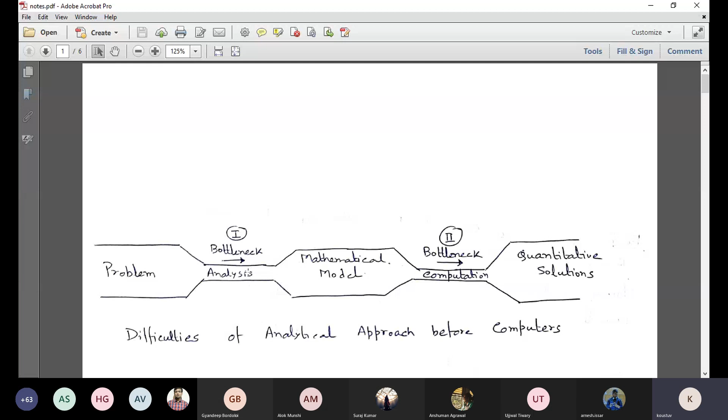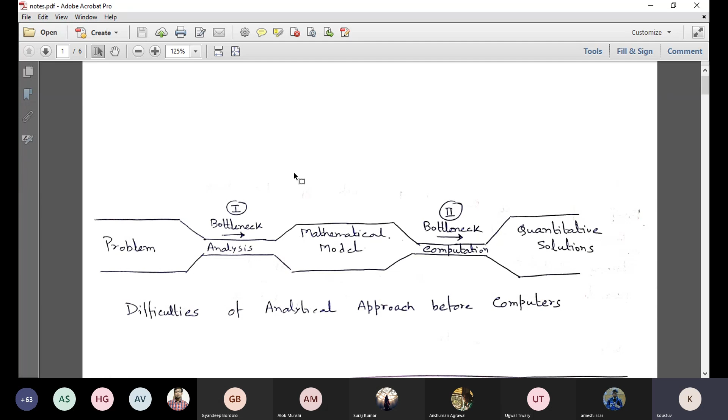So let me skip this part and discuss the content of this course. As I have to start recording maybe. Achha, what is class record? Yeah, I already discussed this. As it is already recorded, that's fine. Now let us go to today's content discussion. Okay, so now, can you see these lines, are they looking small or is it fine? It's okay. It's perfectly fine.

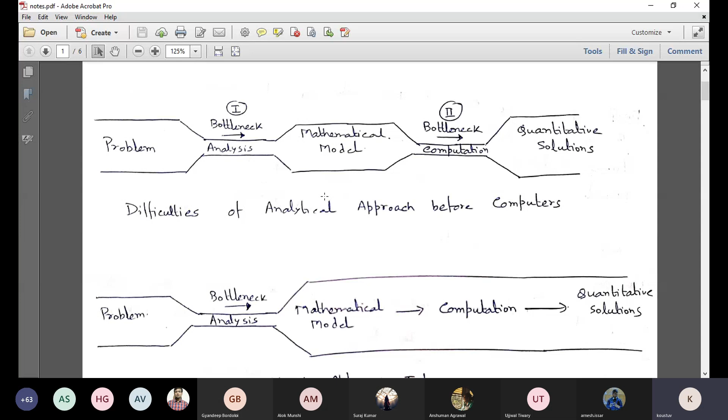Okay, thank you. So yesterday we left this part, which is just to give you an overall idea about how computerized simulations or computer tools are actually helping us in solving complex problems that we commonly face in the chemical engineering or process engineering stream. In earlier days, computers were not available, and the digital scope was not there. So people used to rely on solving the equations by mathematics or the available analytical solutions. So there were almost two bottlenecks.

First, the analysis part of the problem, that means the problem formulation. That is one important area where you have to emphasize more. So that is bottleneck one. That is a kind of challenge. You have to bring out the mathematical equations. You have to formulate the problem in such a way that it represents it. So from the definition of the problem, you have to formulate it. So that is a kind of bottleneck.

And the second hurdle was the solution of those mathematical models. That means the equations, which are typically coupled equations, both simultaneous nonlinear algebraic and differential equations. There is a term called DAE, differential algebraic equations, which has both combined. For example, there are 5 equations in a particular model: 2 are nonlinear algebraic and 3 are differential. So there may be 5 unknowns and 5 equations. So these are complex equations, and yesterday you looked at that table where most of the elements actually fall into the category of impossible.

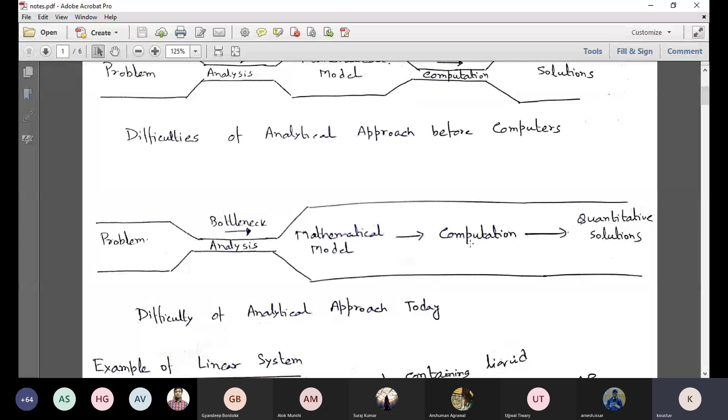So this second hurdle was there in earlier days before computers came. Now the only hurdle present is in the analysis part, the problem formulation part. So this is the scenario today. That means the major emphasis, major importance has to be given to this area, where if you can come up with a suitable model, then getting the solutions or quantitative results is not a difficult task.

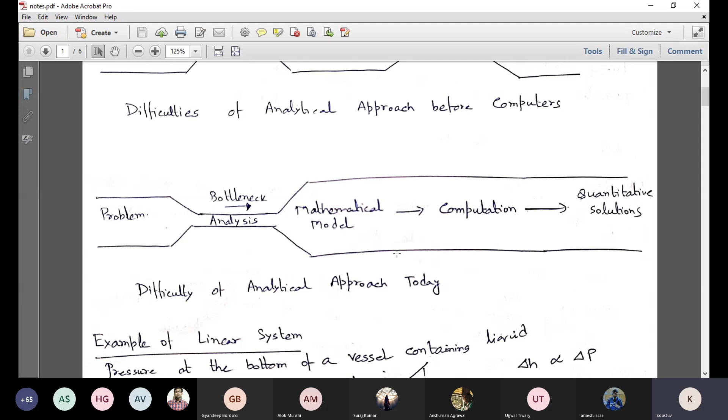Now there are examples of linear systems. This is not difficult; you can easily follow. You see, the pressure at the bottom of this vessel containing some liquid is a linear function with respect to the variable h. That's the height of this tank. And this is the atmospheric pressure, and this is the pressure at the depth h.

So one has to be very careful about which one is the dependent variable, which one is the independent variable, and which are the parameters. These are very essential elements of any modeling task: identifying and selecting the particular variables. So this is a linear system example.

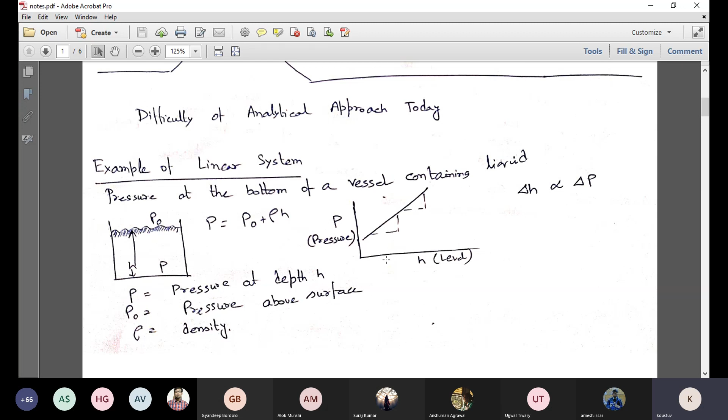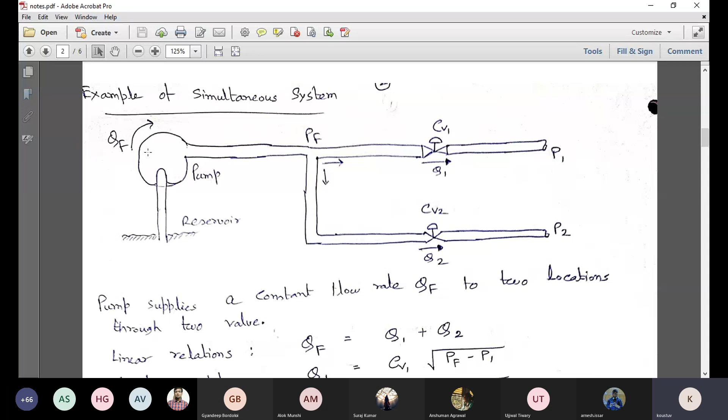Now there can be both linear and nonlinearity in certain systems. Let's say this is an example of a reservoir from where you are using a pump to send water to two different locations, and the exit pressures there are P1 and P2, and this is the pump. QF is the total flow rate or discharge rate, and this is the discharge pressure PF. Now this is logical, right?

The relation we can make from this system is a summation of total volumetric flow rate. Obviously this comes from the mass balance, and I have not incorporated the density because it's assumed to be constant. When we do complex modeling problems, we'll see the step-by-step task: first defining the problem, then writing the assumptions. That is very important. If you change your assumptions, your model equations may change.

But here there is not much complexity. It's a simple system, but having both linear and nonlinear terms. Here the nonlinearity is coming due to the flow through the valve. This is the typical expression you have already seen from fluid mechanics, coming from the energy balance, the extended Bernoulli principle, for flow across the valve. So any change in delta P is not linearly proportional; rather, the square root of the pressure is proportional to this flow rate, the discharge rate.

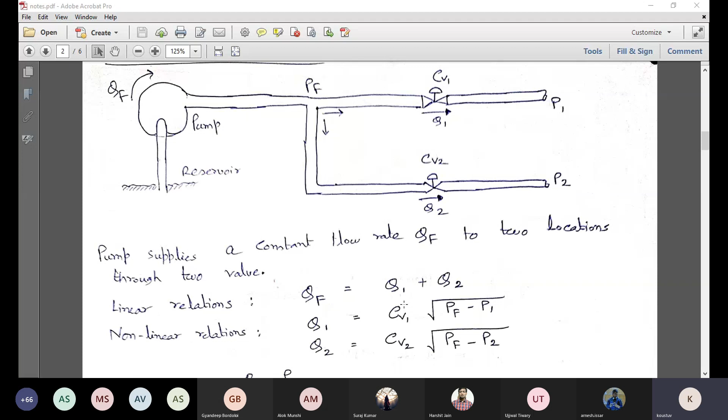So this CV1 and CV2 are typically constant, so you can term them as the parameters of this model, rather than these are the variables. So Q1, Q2 and PF, these three are basically unknown, and the rest of the quantities are known. So here one thing is very clear, that you have to first identify the unknowns present in the system, and accordingly you have to frame equations so that the number of unknowns is equal to the number of independent equations.

Now here one thing is very important, that when you are framing this kind of logic, or you are getting as many unknowns as independent equations, then you have to thoroughly check that you don't get any redundant equations, because if you get a redundant equation, then that is coming due to some algebraic operations, let's say addition of two other equations, or multiplication by some constant and then addition or subtraction. So that equation can no longer be considered an independent equation, because it is related to other equations.

So invariably your number of equations is less than the number of unknowns or the number of quantities to be solved. So in that case, your solution is not unique. You have multiple solutions, and that case is not desirable. We are not looking for that situation. So you have to be very careful. You have to very thoroughly understand the problem and identify the number of unknowns or quantities that you have to solve, and then frame the equations so that the number of unknowns and the number of independent equations, not the redundant, become equal.

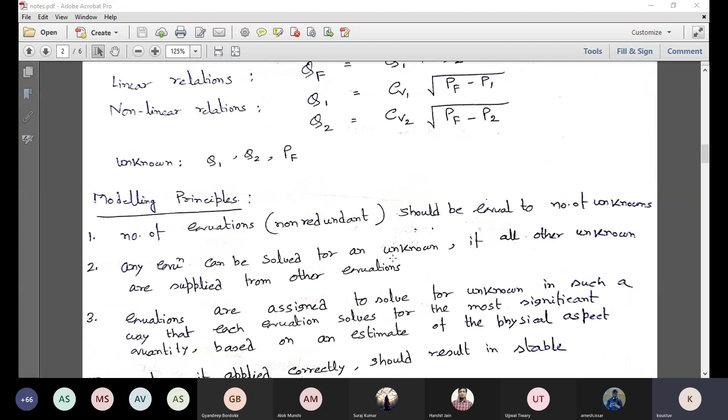So that is the meaning of the second point, that other unknowns should be supplied from other equations. And the third is the equations are to be assigned so that you can solve for the unknown in such a way that it is the most significant quantity. So here the significant unknown quantities are Q1, Q2 and PF. So we have written the equations in that way, but PF and Q1 are actually coupled; these are not explicit, these are implicit relations.

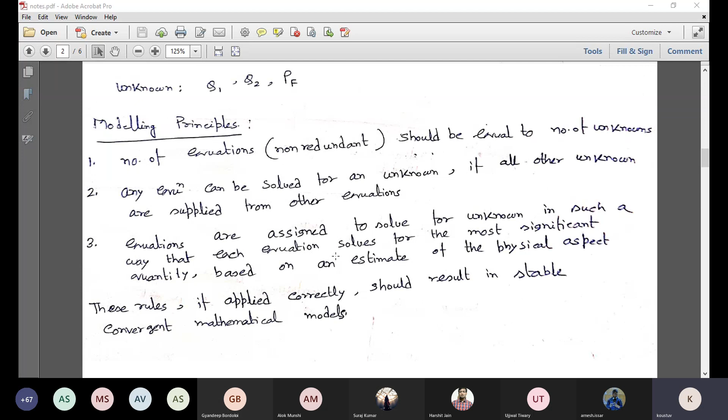So you know the meaning of explicit and implicit relations? Yes. Okay, so this is an example of that. So you have to solve simultaneously. And this is typically like a thumb rule, or you can say general principles. And if you follow them, then you should get a stable and convergent model as well as its solutions.

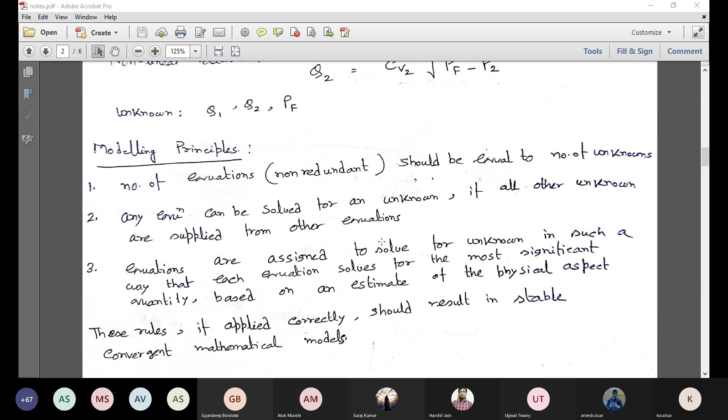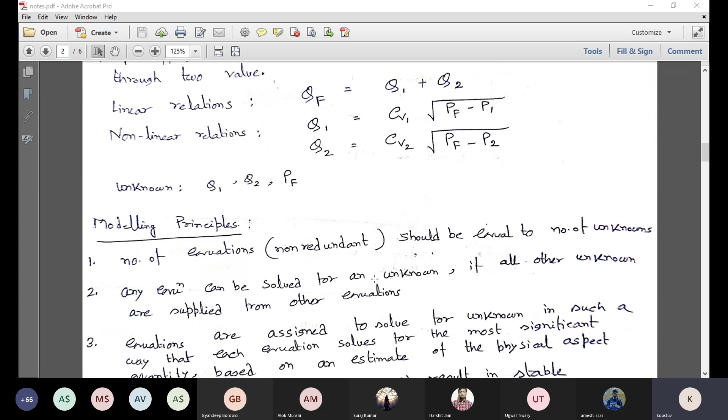So these are a few examples, and many other typical examples can be framed. I have not listed the differential equation examples, which we will take up in separate classes. So today I just wanted to emphasize these modeling principles so that these two examples hold true, and then we'll move to the important part, which is the information flow diagram. If you noticed in the last class, we discussed the two major segments; I marked them in red and green in that whiteboard diagram.

One part is the problem formulation. So you have to define the problem, you have to understand the phenomena or physical laws or governing phenomena that are occurring. Accordingly, you have to write the model equations, the relations. It can be algebraic, it can be a differential equation, it can be a partial differential equation. If it is an unsteady state problem, it would result in some different kind of equation. If it is a steady state problem, then another kind of mathematical relation would result.

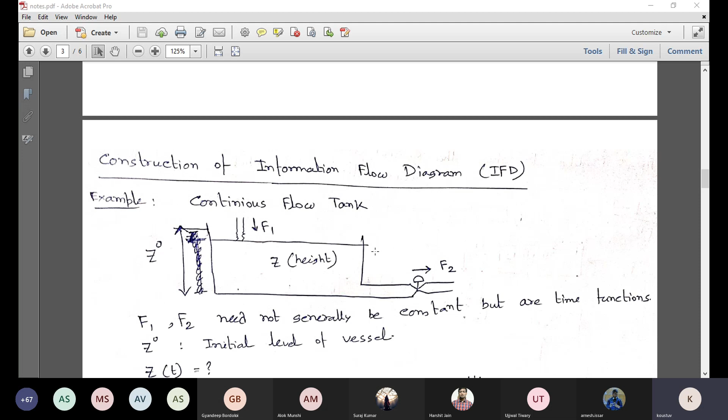So the nature of the problem is coming in that second segment, which is the physics or theory of the problem. So all four blocks in the last day's diagram, if you remember, come into this form of information flow diagram. So let us see this first example.

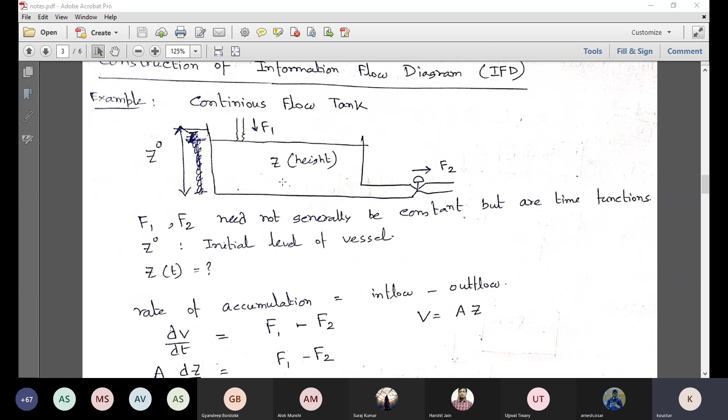This is a continuous flow tank, and there is one inlet and one outlet. The outlet line is connected through a valve again, and F1 and F2 need not be constant. They can be time functions; they can be dependent on time. The variations between F1 and F2 cause the height of the tank to change. So Z invariably depends on time, and we can monitor the height as a function of time.

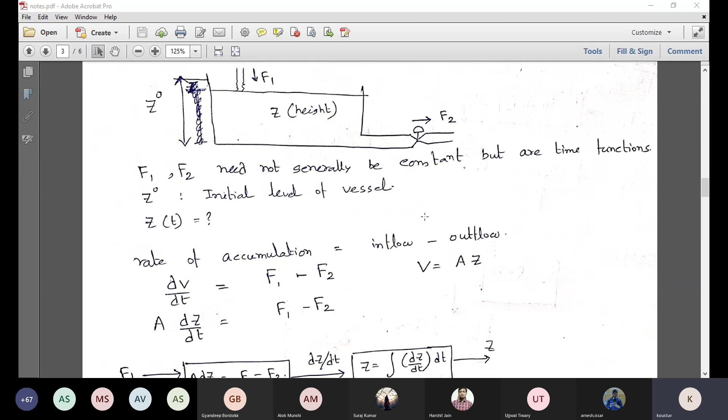We can simply write that the rate of accumulation is equal to inflow minus outflow, and this is a relation that we can write, provided, again, I have not written the density rho. It is assumed to be constant. In fact, one should write that. I emphasize that while doing this kind of thing, it is always better to write the assumptions involved in the system, because that plays a very important role. If you do that, you end up with this kind of relation. So this is a first order ODE.

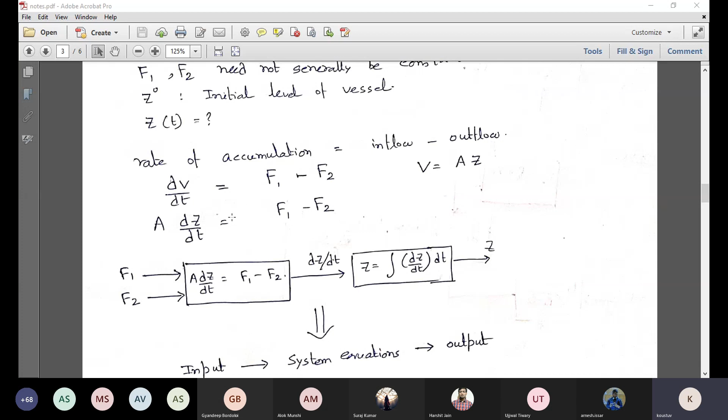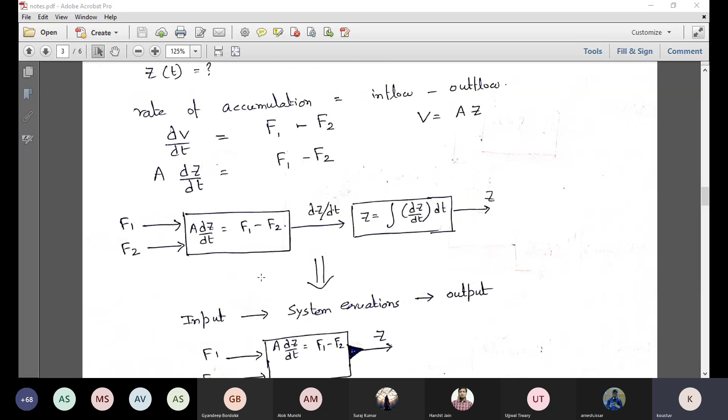And what is this block diagram? Information flow diagrams are nothing but connections of blocks, which tell you where you start from the input, what mathematical relations describe your system, and what output or quantity you are going to obtain. So there is an input, F1 and F2, then the model block containing the system equations, and then the output that you are actually getting.

Now this is a simplified version of what you see in the diagram above, because you have to integrate to get the height, that is Z. This triangle is nothing but a symbol of integration. Whenever you have a system where integration is involved, you can draw it like this, so that you can identify that this is a differential equation. Other algebraic relations do not require this kind of representation. It is just to mark that it is an integration, and the others are algebraic relations. So this is the representation.

On one hand, there are the inputs going to the system, which are typically known, or if not, obtained from some other relations. That forms the input to the system. Then there are the model equations, or system equations, that you are going to solve, and then the output you are looking for. Now this is one equation with one unknown. If there are, let's say, 2 or 3 unknowns, you can pass one particular unknown to another block, another set of equations, where this Z can be used as an input. We'll go to a more complex problem just after this, to show that there can be many blocks simultaneously, and the arrangement of the block diagram can be more complex.

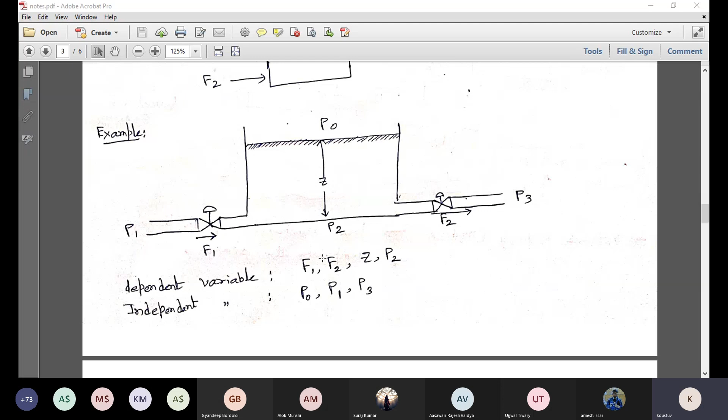Whereas the inlet pressure and the exit pressure are typically known, and atmospheric pressure is known. So these are like independent variables; these are constant, you can say. So since there are four unknowns, it gives an indication that you have to frame four model equations which are non-redundant and independent, so that you can solve them and get a stable value, or a convergent value.

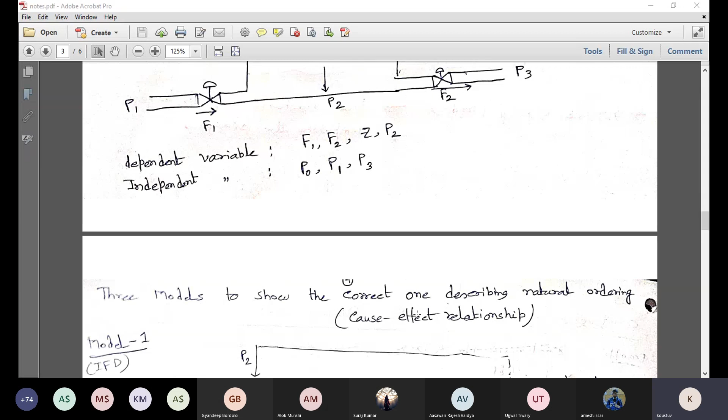So here we'll have another model diagram, but the one important aspect that I was making in the last lecture is the cause and effect relations, or natural ordering. Now, this diagram that I have made here is an information flow diagram. So let us try to understand what is happening. As you see, there are four unknowns: F1, F2, Z, and P2. One thing is very clear, as many unknowns, as many equations. Now each equation is represented in the form of a block, connecting the input variables and the output.

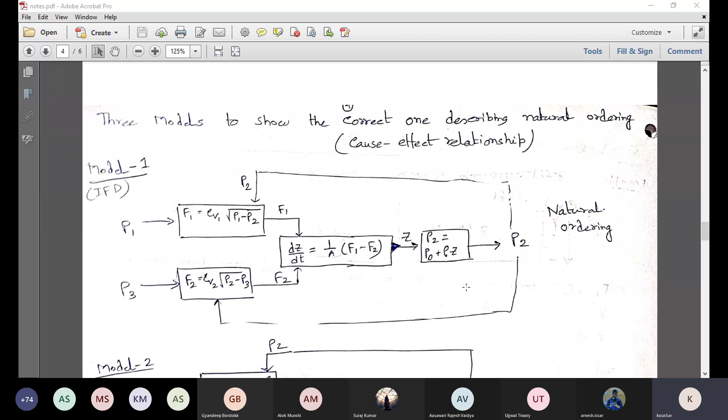Now there are actually three different model configurations possible, right? We will discuss each one of them, and we'll try to identify why the other two are not following the natural cause and effect relationship, or why the other two are not falling under the natural flow, natural ordering, natural sequence. So first let us see the first one. Although I have written natural ordering, we'll try to understand why it is so.

So you see P1 and P3, right? P1 and P3 are your independent variables and inputs to the system. Due to the pressure difference in the input line, the flow F1 into the tank occurs, and the flow leaving the tank, F2, is also related to the valve equations, which are nonlinear, as we have seen earlier. Here you see P2 is actually unknown, but it can be solved from some other equations and taken as an input to this particular block.

So from here, what are we actually solving? We are actually solving F1. But what are the inputs to the system? Inputs are actually P1 and P2. CV1 is the valve coefficient, which is constant. Now one can argue that P2 is not directly known, but from the modeling principles we have seen that any equation can be solved for any unknown, provided the other unknowns can be obtained from some other equations. So P2 can be obtained from these relations and fed directly as an input to this block. So F1 and F2 we are solving through these nonlinear algebraic equations.

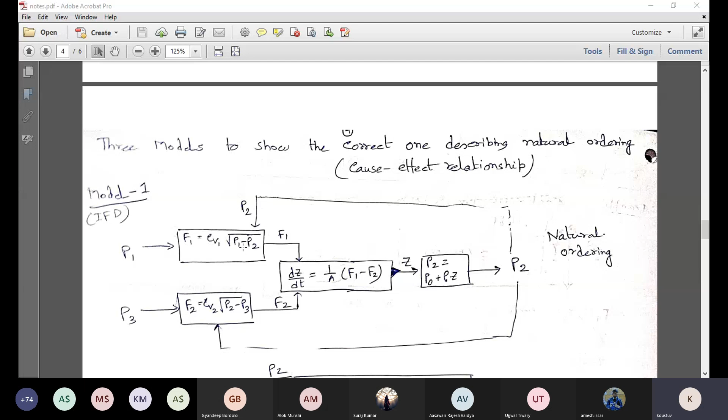Then we are using another set of relations. These relations are linear in nature, a linear algebraic relation, where Z acts as an input, P0 is known, and P2 you can solve. This P2 is again used by some other block, so you can directly follow the sequence. You can follow the natural flow, relating the problem from definition, from start to end. But we are solving for unknowns simultaneously, and it gives a balance between what we are actually seeing as a difference between F1 and F2. We are getting Z, and this Z is actually used in these relations.

Sir, from the first block, how do you get the value of F1 and F2 if you don't know P2? Yes, that's what I said.

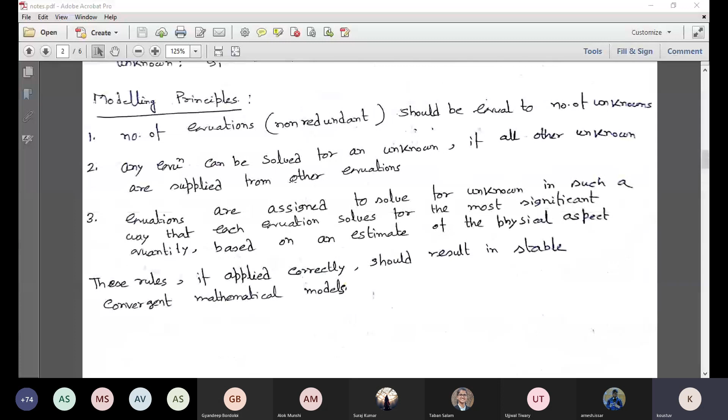P2 you will not get directly from this. So you see this P2 and P1 - P2 is actually obtained from the fourth block, right? As I said, this is not explicit - these are all implicit relations. These four model equations that you can see here are not explicit in nature. If you go through the modeling principles, the second point says any equation can be solved for an unknown if all other unknowns are supplied from other equations. So you see that this particular block which relates P2 and Z gives us the value of P2. On one hand it is the input, on the other hand it is the output. Now this output can act as an input to this system, and you will get F1.

And one would expect that one would integrate to get the value of Z, right? There are several integration routines available, so that is not a difficult task. Is it clear?

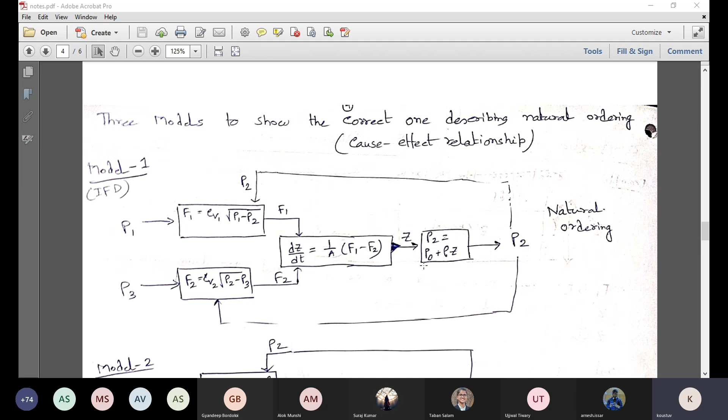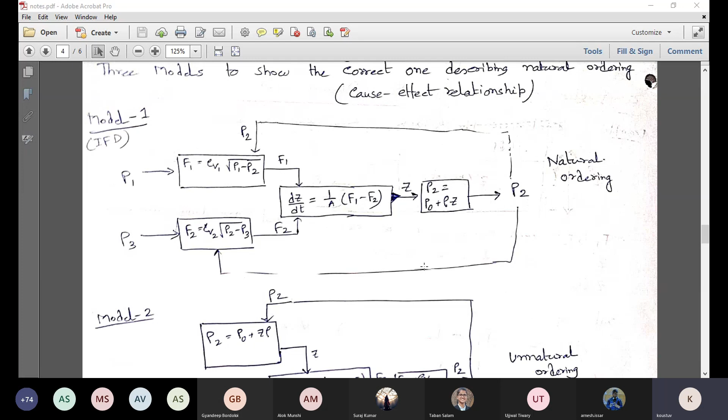Okay, let us see the other configurations that are actually possible, and why we are not preferring them, although they are mathematically possible to solve. We call them unnatural ordering, not following the natural cause and effect relations. Just try to see this model 2 - another configuration based on the information flow diagram. Now we can arrange them in this sequence also, right?

So what are essentially there? There are two valve equations related to flow rate F1 and F2. One is P2, which is the pressure at the bottom of the tank, and the other is the height variation of the vessel, as a difference of F1 and F2.

Now, do you see any of the natural sequences in this particular arrangement? It is mathematically possible - I would say you can solve the four equations - but the way it is represented, it is violating, or rather not causing the natural flow. Why? You see here that on one hand you are giving an input to this equation to get F1, but instead of solving Z through integration, you are actually supplying Z and trying to take the differentiation to get the unknown F2, which you are using in this valve equation to get P2, and then you are getting this F1.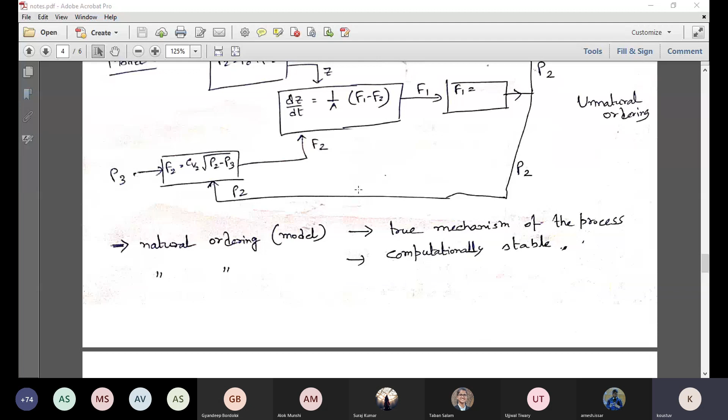And another way, if you create your IFD, information flow diagram, through this model sequence, it gives you the proper flow to understand the problem and to get solutions which are more stable. Because if instead of integration you do it by differentiation, then it is cumbersome or difficult, not an easy thing. That's why this natural ordering is always preferred over this other arrangement.

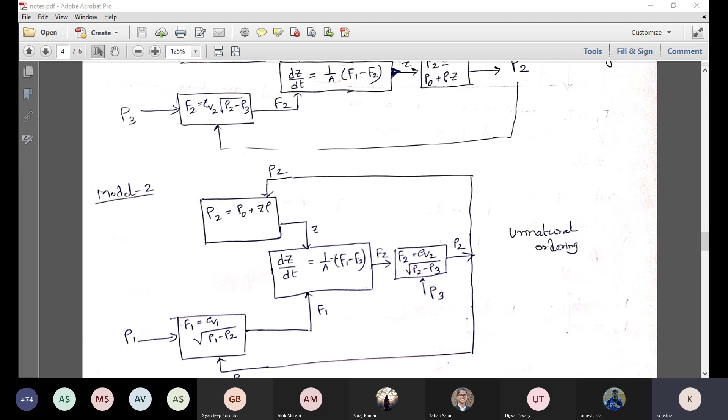These are possible in reality, in principle, but actually for solving, or for implementation, it will fall into trouble, because we always prefer numerical integration over numerical differentiation. And secondly, this doesn't give us understanding of the process in a better way. That's why these three different sequences have been shown, and why we prefer the natural ordering has been justified.

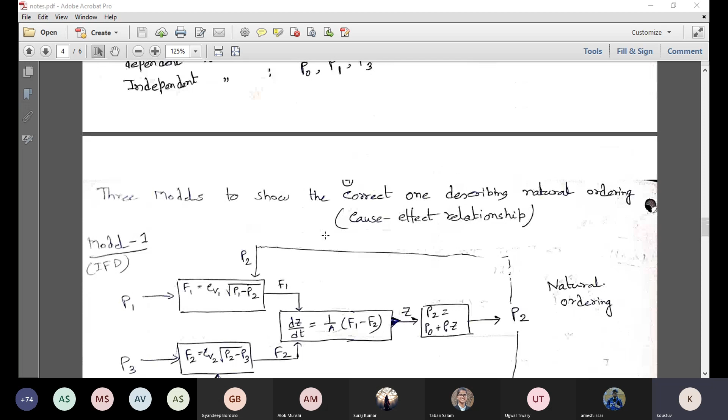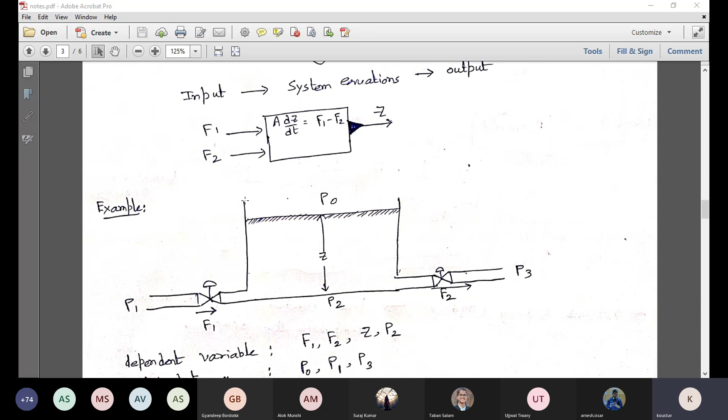Now, this is one example. There can be many examples. Let's say this particular example problem, we can modify a little bit. So you can pay attention here to the fact that today this P0 is an external pressure, or the atmospheric pressure. Now we can extend this particular vessel to make it a solid line, or to make it fixed. We can have this kind of fixed slab, or a fixed vessel, fixed tank. So then P0 will no more be external to the surface, it will be internal.

So some kind of vapor or gas, you can say it will be occupied in this section, and it would be another variable, another unknown to the system, another quantity to be solved. And a typical gas law, maybe ideal gas law, you can assume, would be added to this particular system. So another block, another unknown. So we can extend the system and make a more complicated system.

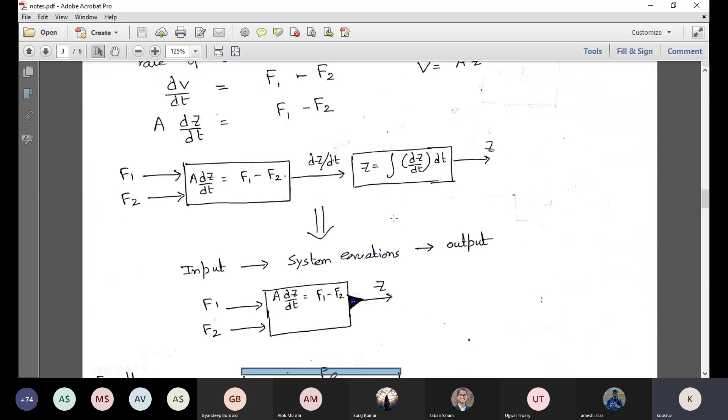So there will be some assignments based on this and other examples to create information flow diagram, and preferably the natural ordering sequences. So that is one type of assignment I am planning to give after today's class. This example has been taken from Roger Franks' book, and mostly I am following that particular book.

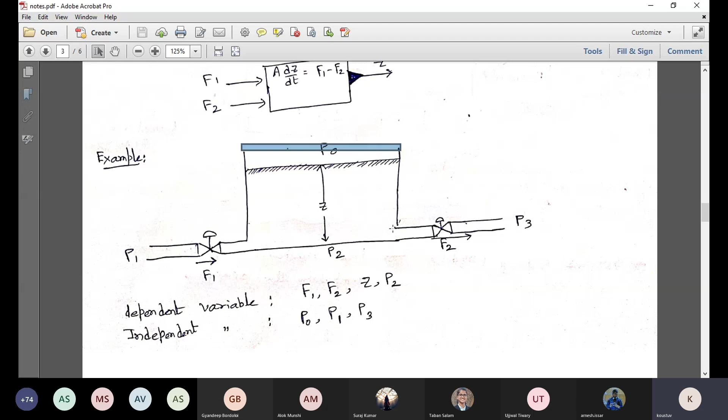So some more examples can be in this way, that chemically reacting vessels, both reactions and continuous flow process are occurring. So simultaneous reactions are actually occurring and happening. So in that way, you can think of other examples. Those are different examples, and in the same way you can create information flow diagram and the natural ordering sequences.

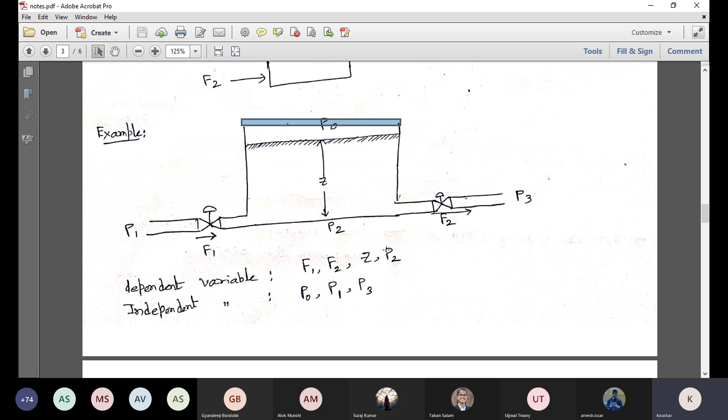So this is a slight variation to this thing, adding another step to this particular problem. So you can think of creating that, or you can do it later. I'll see if it can be given as an assignment. So I just added this slight variation to this existing system. So in this way, you can think of many different types of problems to get an understanding of the construction of IFD.

Okay, so now before we move to the next part of this lecture, which is the application of linear algebraic equations.

So how many of you are familiar with MATLAB? Most of you. Have you installed it earlier? Have you used MATLAB? Yes sir. So this numerical methods course was taught to you in a previous semester? Yes sir. Reaction engineering was also covered? Yes sir.

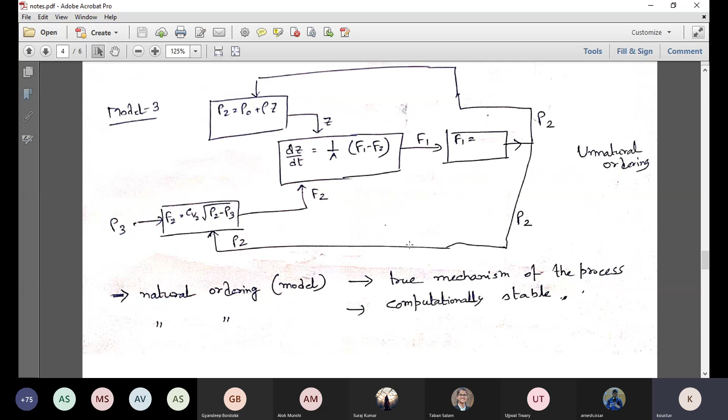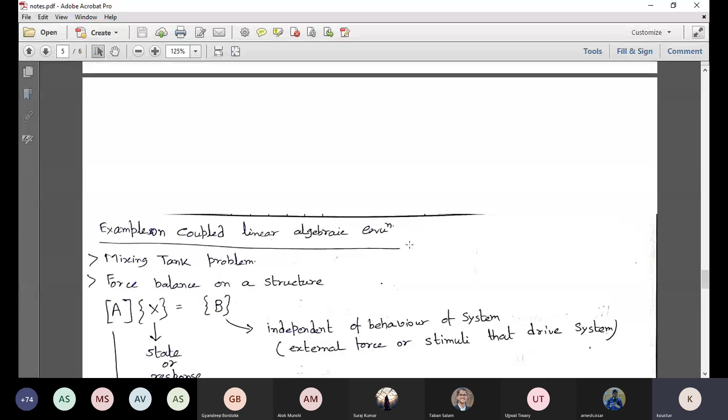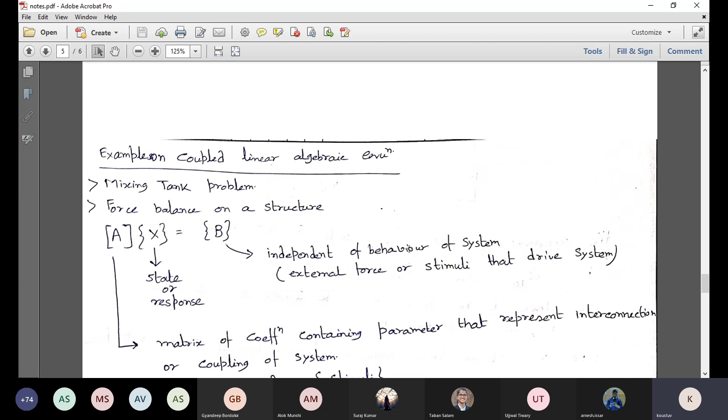So I can think of giving a particular problem which combines many of these relations, and that would give you some practice to understand more. Now we are moving to the next part, which is the mixing tank problem, and the application of Gauss elimination where simultaneous linear algebraic equations appear. In this mixing tank problem, we have several interconnected tanks in series-parallel formation, and since it's a mixing tank, the output from one tank can be fed to another tank. So this particular arrangement is possible - different streams leaving one tank feed into another tank, and that's how this system is set up.

Before we actually solve it - for any of these modeling problems, we can directly write mathematical relations and solve them for unknowns. But two major points I would emphasize: one, just for the sake of results, we should not solve it, and just for the sake of modeling, we should not do it. We should thoroughly understand why we are doing it, and whether the results, the numbers or data we have obtained from the computations, are making sense - are they realistic or the desired values? That is number one.

Secondly, what other inferences can you draw from the results? Apart from just the numbers, what physics or extra concepts does it add to the problem, related to that particular system? So are you able to extract more information from the data? That is the question. We should always think that in any modeling task, there is a pre-processing and a post-processing stage - these two things are very important. This particular example looks trivial and simple, but I have tried to justify these two facts - that before you write the model equations, you should give emphasis to extracting more information or concept from that particular problem.

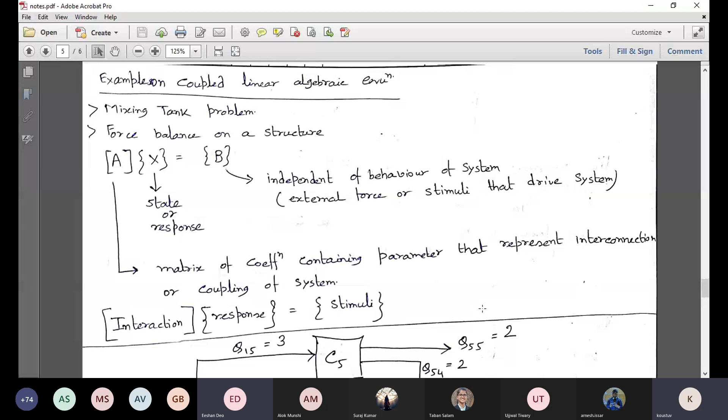For some other tank, there may not be some constant. Sir, why is B independent of the behavior of the system? Yes, I'll come to that. It means that B is basically a constant matrix or column vector. Now, independent of the behavior of the system, it means

anyway, these C1, C2, C3, C4, C5 tanks will give you the outlet concentrations, the concentration that is leaving the tank and inside the tank. So independent means today I can change another stream. Let's say we do not have this particular stream available, Q naught 1 and C naught 1, but some other tank has that kind of input. Let's say instead of going to C1, this particular stream can go to C5, right?

That will change the response definitely, but the way the mixing tanks are represented, the behavior, the outlet concentrations, will already be there. That means if you change this particular stream to some other location, it would change the value of C5, but it would not change the configuration or arrangement. Some response will be different, but the pattern or the way the variables are arranged will not be changed.

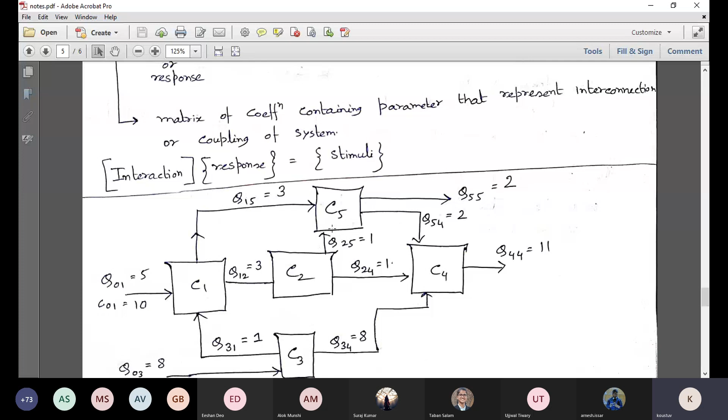So basically, a better understanding is that it's acting as an external force. It's a kind of stimuli that drives the system. That means it causes the changes in the concentration of that particular tank. Does it make sense? Yes, sir. Or you want to add anything?

Sir, can you please explain the three parts again, A, X, and B? AX and B, right? A I have not covered yet. First, I'll cover the explanation of A, then I'll again try to explain AX equals B. We are still on this B column vector. And what is A? When you write the mass balance equations, you will see we have solved this problem. But before we go to that part, let us try to understand this.

See these interconnections, the different flow rates leaving and going to some other tank. These interconnections are actually the elements of this A matrix. That means A is basically the interaction matrix, the interaction among several tanks. The whole system consists of 5 tanks; it can be more than 5. So depending on the interconnections across each tank, this A matrix will change. The elements will change, but the nature will remain the same.

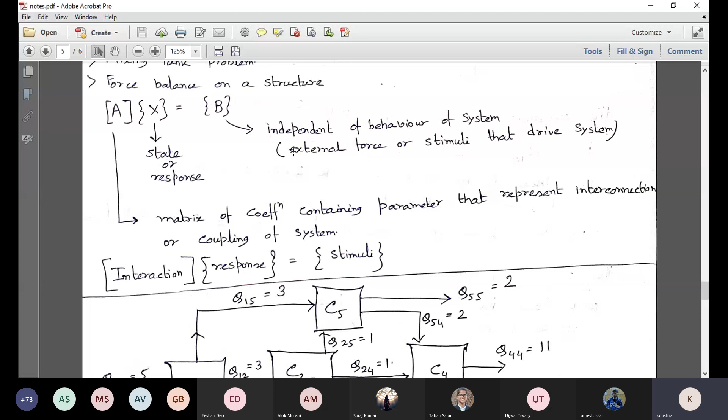So similar to that, the logic I'm trying to put for B is that today the numbers can be changed. The elements of the B column vector may be changed because today C1 and C3 are getting that particular input, and because of that, the concentrations are distributed through these interconnections. So if instead of C1, the input is given to C5, then the elements of that column vector will change. They will be different numbers. Accordingly, X will change.

But the behavior is largely dependent on the way the tanks are interconnected. I'm trying to justify that the way the tanks are interconnected, we are not changing. We are just changing the input stream, or the driving stream, which we are calling stimuli.

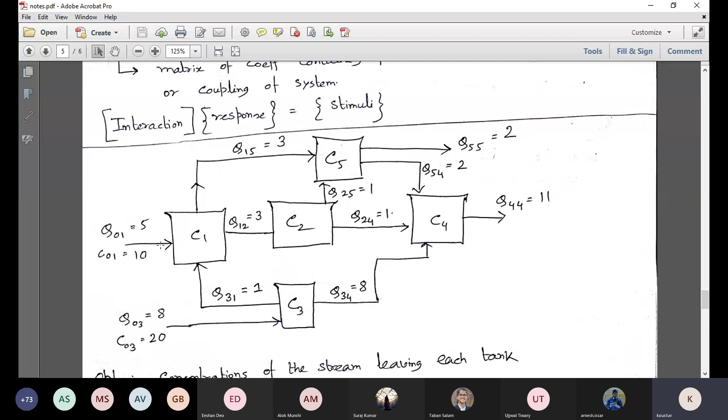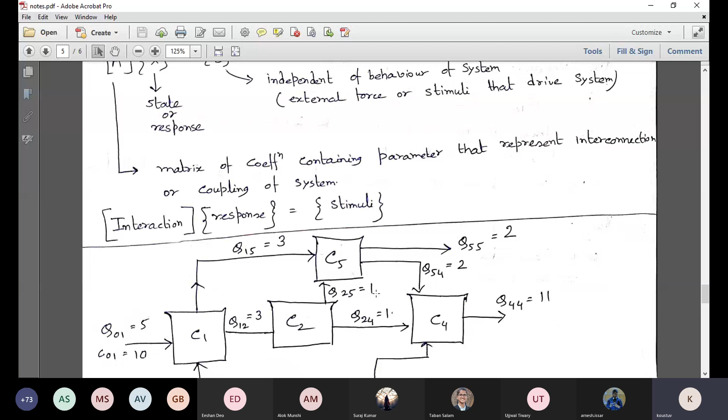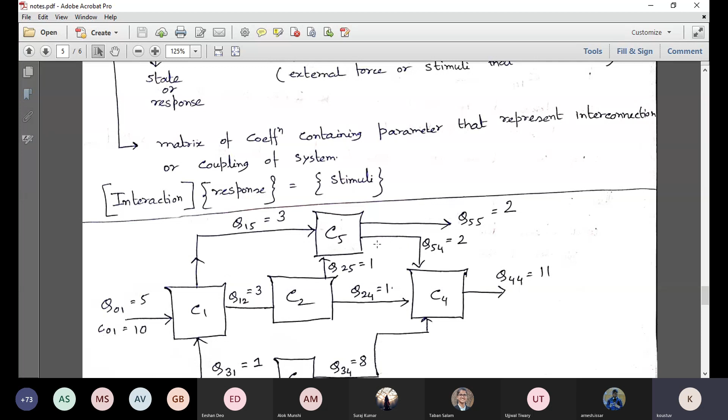That would change the variables, that would change the unknowns, but it would not change the behavior of the system. That means the way the tanks are interconnected to each other, we are not changing that. We are not disturbing that. So the whole system will behave in the same way. That means the interconnections are still alive. The mixing is happening in the same way. So we expect the concentrations to be distributed.

The values will come as a different set of values, but the behavior, that means the connections, the way it is made, you will always get some concentration values, depending on which particular tank you give the input. That's why they said that A is a matrix of coefficients containing parameters that represent the interconnections. So let us see the equations and try to solve it using MATLAB.

So we can see the A matrix, and later we will post-process the result. That means after obtaining the values of the X vector, the concentration of each tank, we can understand the importance of the inverse matrix. That is another part. So first we have seen the implication of AX equals B. That means the interaction matrix, then the response, and then the stimuli or the external force that drives the system.

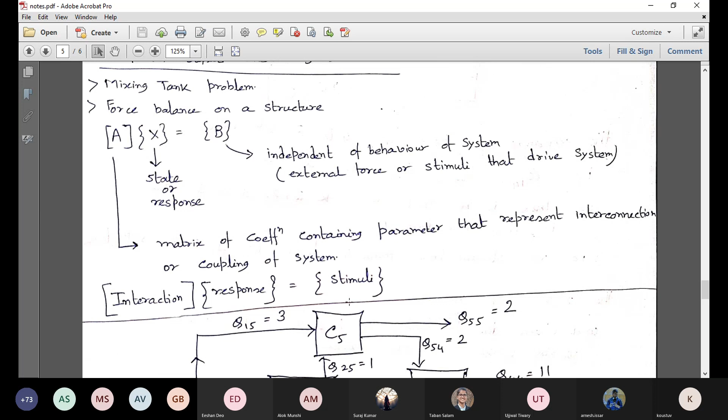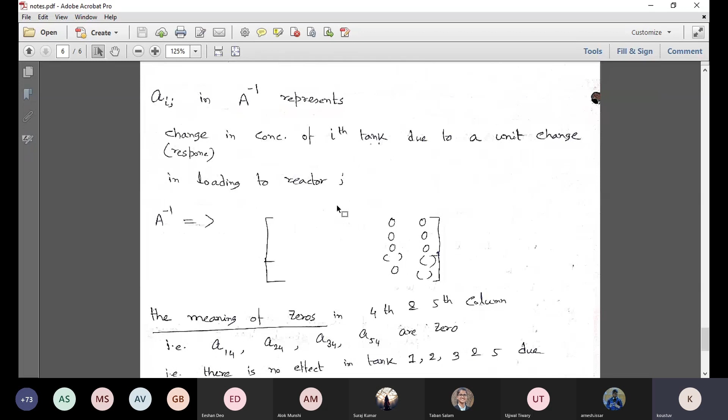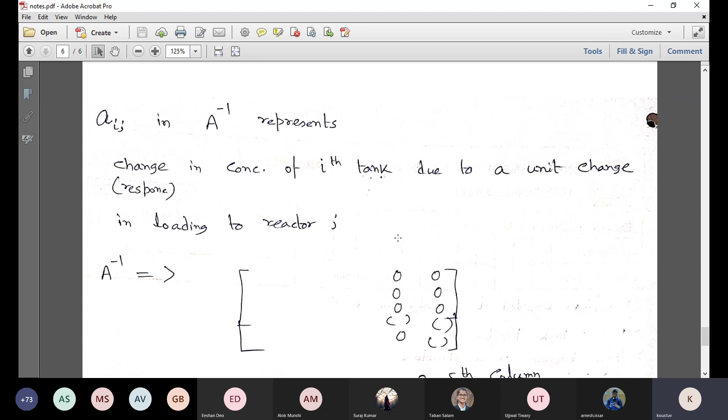Okay, now I will solve this using MATLAB. I will show this. Then I'll come to the last page of this document, the implications of the results. This I'll explain after I show this in MATLAB. So let me share the MATLAB screen and see if you can see that.

Since you are familiar, this interface is nothing new to you. We can solve it in the command window directly. We can also write a script file or MATLAB M file, and directly execute the program through Run. Now, you have to give the inputs, you have to give the coefficients.

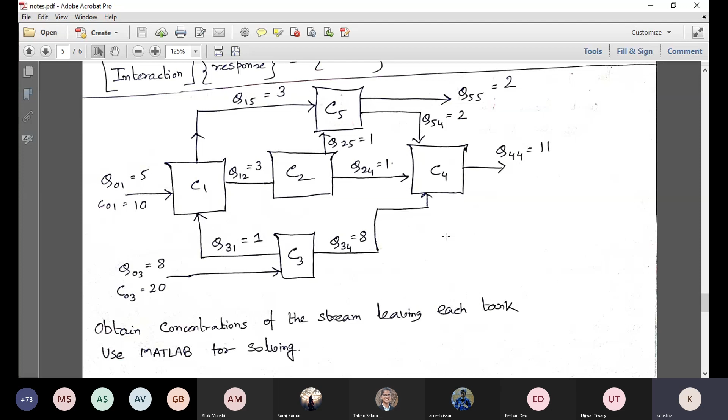If you are done, then you can respond so that we can match the coefficient matrix, A as well as B. Any response, or are you still doing it? Have you finished the 5 balance equations?

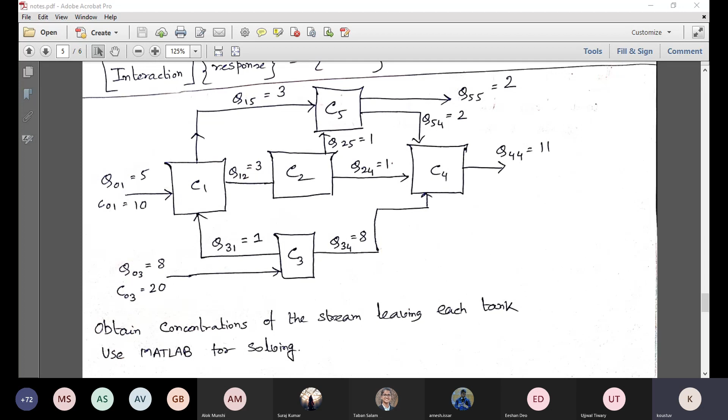So balance equations, if you do it properly, you will get this kind of coefficients. So we have created the 5. The others are already zeros, so there is no need to mention them. So that's why this zeros command is useful. And this b vector, which has only 2 non-zero elements, others are 0. And then you can directly get this backslash. This backslash actually gives you a modified Gauss elimination. I'm not going to the details. Those who are interested can just read from this help. Suppose you write help.

Sir, a few of the coefficients are not matching. Not matching, but you try to see the balances. I would imagine that there must be some miscalculations, because these numbers that I have pasted here are from our example. So these coefficient values are correct. So check once again your balance solution, not now, but later. I think either there's a mistake in the diagram or you have got the coefficients a little wrong. For tank 2, it is 3 inputs and 2 outputs, but you have got a 3 in the coefficients. Sir, the equation for tank 2 was coming out to be 3C1 is equal to 2C2. Yeah. So another 3 should not be there. It should be 2.

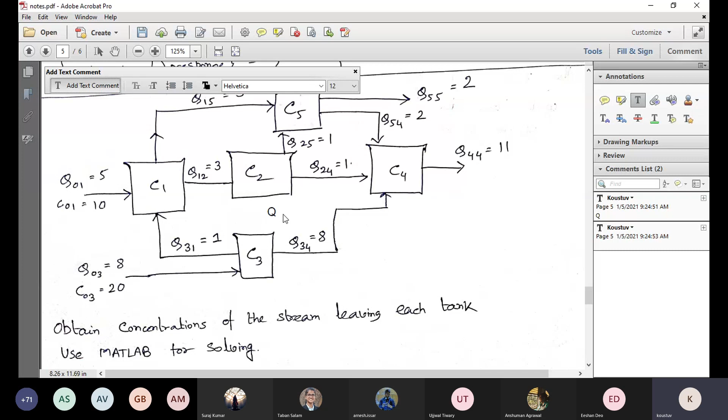So can you edit this in PDF, please? Yeah, I'll add that. But right now, how to do it? Comment. Let me show the PDF. So I'm just writing here. Okay. Just give me 1 minute. I'm just indicating this Q23 so that you can make the balance again.

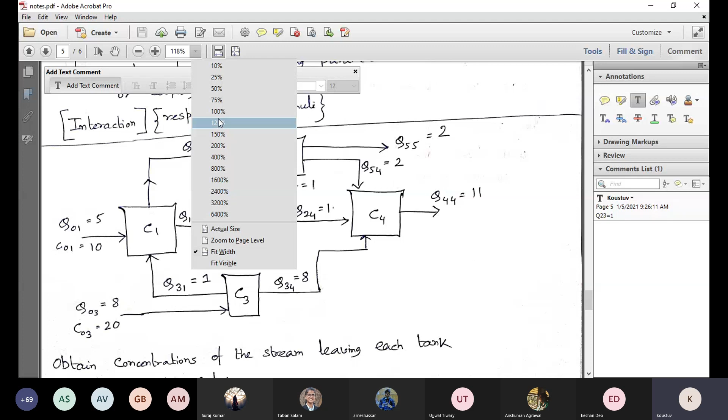See, I have just added this number Q23. The direction is from tank 2 to tank 3. So your balance might take some more time. Would you be able to do it again? The coefficient matrix would again change. Okay, this you can do later. Is that fine if you do it later? So I've done it. It's correct. Your equations are correct. Then your coefficients are correct. Just if you add this Q23 now after that. Yes, sir. I did it.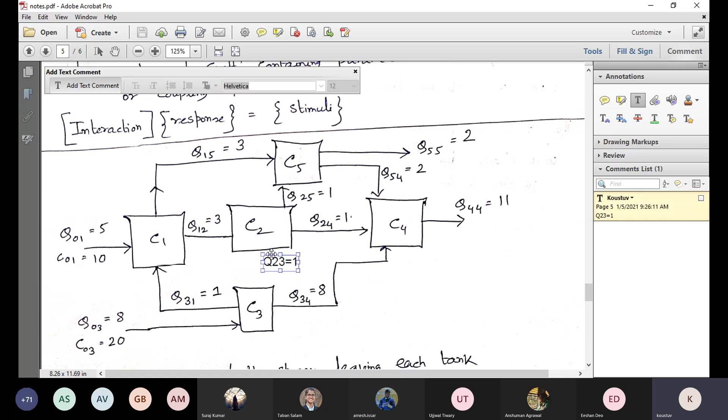Oh, thank you. So this Q23 is 1, and then if you match these coefficients in MATLAB, let me open the MATLAB, then these coefficients are correct. So you will then get the concentration in each tank by A backslash B. So it is basically the response, or the 5 unknowns. And I have also written the inverse matrix, because of the implications or extra information that I was saying, this post-processing of the results.

So what does the inverse matrix element mean? We have understood on one hand the elements of the interaction matrix. The inverse matrix, although we are not seeing it, we can calculate from MATLAB very easily just by typing INV, the inverse of this matrix A. So what each of these elements of the inverse matrix means, we'll see.

So either you can write this M file, or you can directly write the lines in the command window, and you can directly get the number. So if you do it like this, you will get these concentrations according to these numbers. And this is the inverse matrix, right? Just typing inv(A).

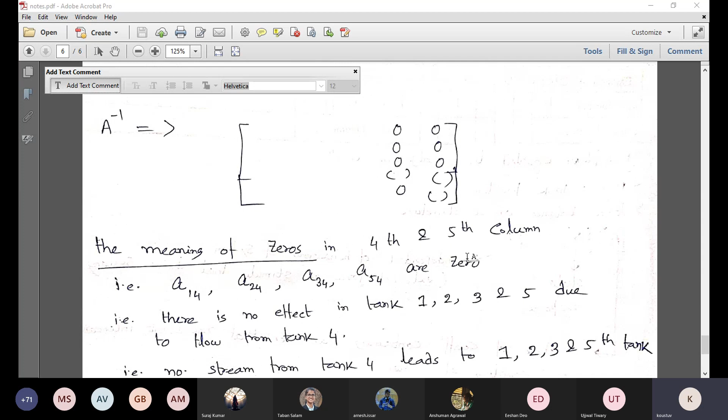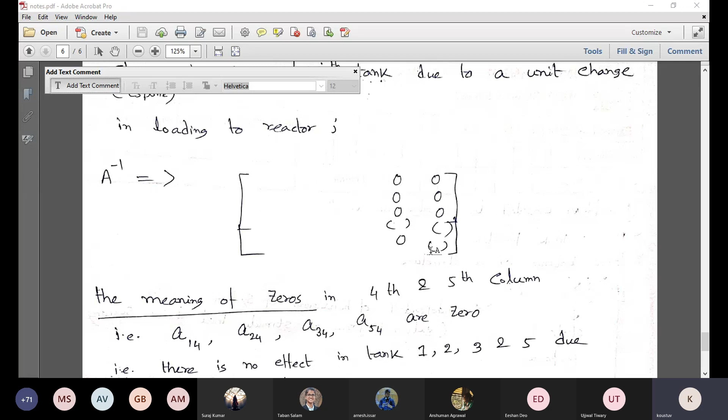In the problem statement, it is broadly telling you that one tank's stream is fed back, or connected to some other tank. So mixing is happening, and proper distribution of the concentration. Each tank has its own output. Go back to this: as I said, in the fourth and fifth columns there are some zeros, right? So let us try to figure out what is happening in the fourth tank.

So each column basically represents each tank, you can visualize. So this fourth tank has only one output, which is leaving, but it is not further going to any of these tanks. It is not going back to 1, 2, 5 or 3.

Sir, are you presenting something? Yes. This PDF. No, sir, we can't. No, sir, I'm unable to see. Unable to see. Okay. Others? Sir, it's visible. It's visible to me as well. That's right. Okay. Just check once. I am actually sharing the screen.

So in tank 5, or column 5, you have seen 3 zeros. If you quickly go back to this MATLAB inverse matrix, let us see which are the 3 zeros. 1, 2, 3. So the first three are 0, and the fourth and fifth are non-zero, right? So coming to this part,

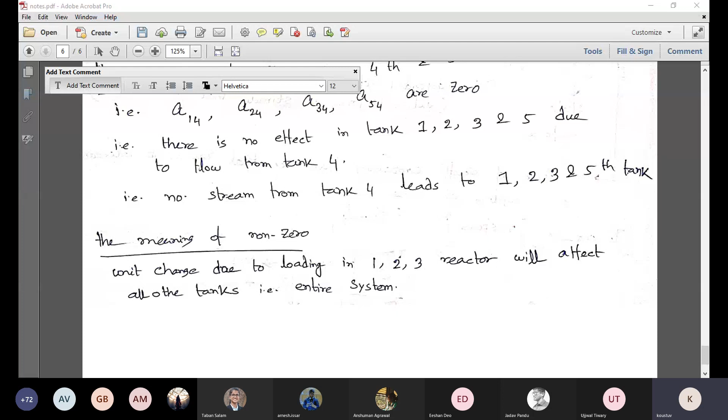So what does it mean? All other tanks, let's say first reactor. So again go back to the non-zero elements in the inverse matrix. You see the non-zero elements are in tank 1, tank 2, tank 3. Now just concentrate on tank 1, 2, 3 and you will understand. In tank 1, you see that all the inverse matrix elements are non-zero. That means output from the tank 1 is affecting all other tanks.

And let us go to the diagram to see if the connections make sense, or if the problem statement is telling the same logic. So a loading change in tank 1, that means the stream that is coming from tank 1, is affecting all other tanks. Directly we can see C5, directly we can see C2. Now C2 and C3 are connected, right?

I missed this connection. So in a way C1 is affecting C3, and since C1 is directly connecting to C2, giving this outlet stream, and C2 is again giving to C4, C1 is connected to C4. So any change in tank 1 is affecting all other tanks. That's why you are seeing all the numbers are non-zero.